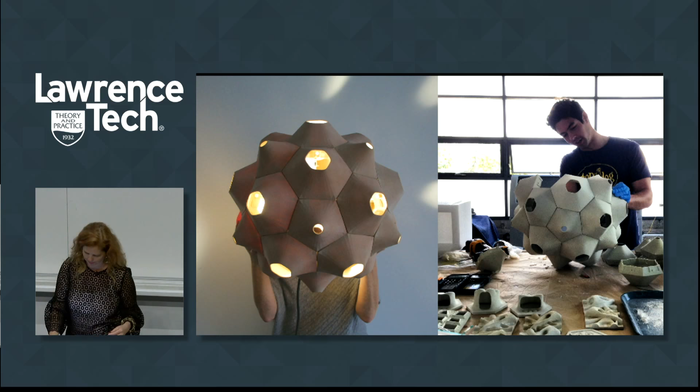So here's an example of something that was designed in my studio and assembled by someone else across the country. This is the Starlight. It's made out of 3D printed cement, a material that we invented, which I'll talk about a little bit later. One of the nice things about this particular light fixture is that not only can the digital file be sent across the world, and each of these parts printed somewhere else, they're small—the size of your hand—so someone can very easily assemble these small parts. This same light fixture can also be 3D printed out of different materials. Here on the left, you see copper-infused filament, and on the right, white bioplastic, which is made out of corn.

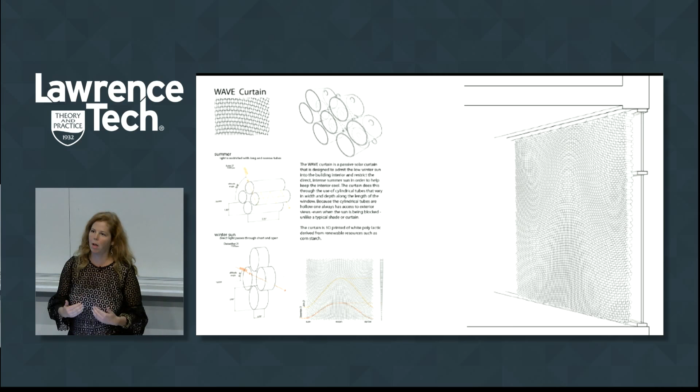Another advantage of 3D printing is that it allows for mass customization. You can design for specificity. In the design of this curtain, you can see in the drawings on the left that every one of these elliptical forms has a different profile and a different depth. The narrower, deeper tubes are located at the top of the window, masking the summer sun from coming into the interior, while the larger, shorter tubes are at the bottom, allowing the low winter sun to come in. Because every tube is unique, I have a customized surface that responds to the solar orientation and geography of the building.

But it still allows me to have views out into the landscape beyond. Unlike a traditional curtain or screen that veils the interior, I can see downtown Oakland. Again, this is designing for mass customization with specificity.

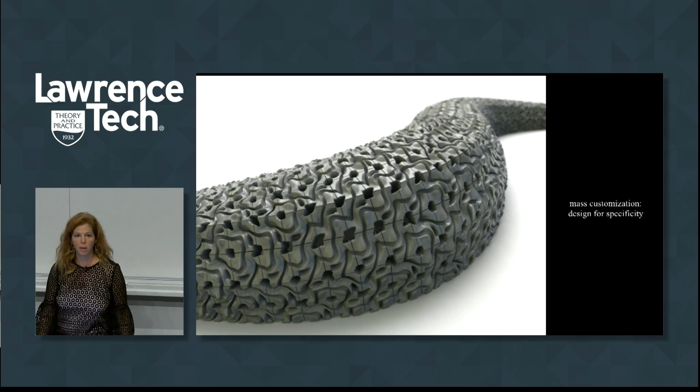Unique, one-of-a-kind building components can be generated quickly and economically from advanced three-dimensional modeling software. This bench, for example, is composed of 300 unique 3D printed parts. It's inspired by the sea slug, a biomorphic interpretation of a bench. The form comes from Flabellina goddardi, the newest species of sea slug discovered off the coast of California, and from the infinite tessellations of Japanese karakusa patterns, which are repeated across the doubly curved surface of the bench.

You can see here the 3D printed parts that come out of the printer in their green state, and every one of them is unique. All of these parts are finished with a glossy coating so that they reflect sunlight, since this bench was intended to be outside. They're assembled together as bricks or tiles that fit into your hand, making an 11-foot long 3D printed bench where every tile is unique.

So the sea slug bench demonstrates the potential for mass customizing, because 3D printers don't care whether they're printing 1,000 of the same parts or 1,000 unique parts. The cost of the material is the same, and the labor needed to make each part is the same. Custom parts can be manufactured without additional cost.

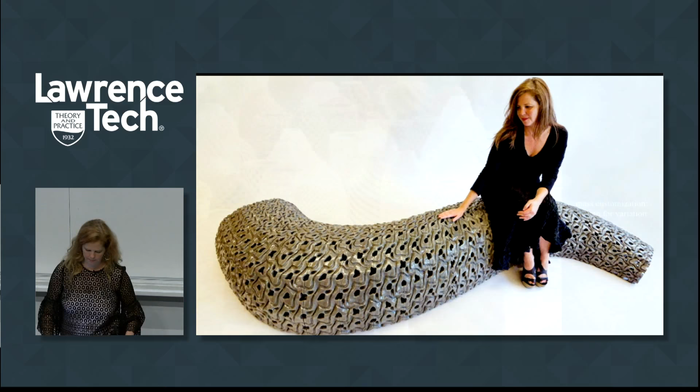Now, we can design for specificity, but we can also customize for variation. In addition to powder-based printing, which you saw earlier, we're exploring paste extrusion 3D printing, which has allowed us to explore radical 3D printing techniques, resulting in a series of objects called G-code clay.

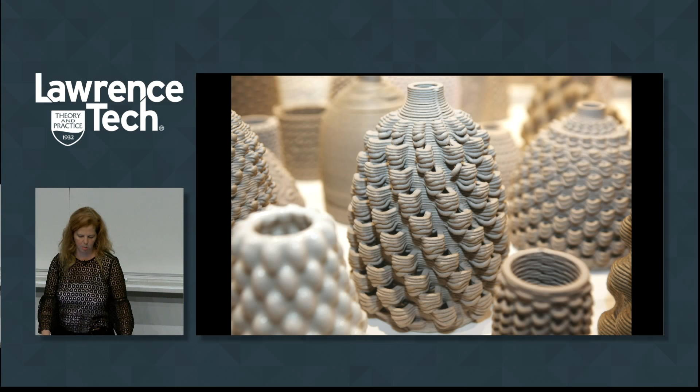Typically, extrusion-based 3D printed ceramic objects are defined by the layers of clay, whose striations are present on the surface. But as demonstrated here, the surface quality takes on the appearance of a knitted textile. The clay is looped, purled, and knotted as it droops away from the surface, and occasionally there's a dropped stitch, which causes a loop to pull away and makes every single print unique.

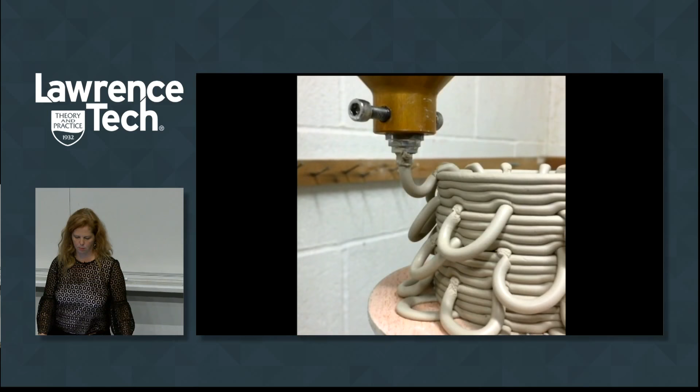The objects that are fabricated use various clay bodies. Sometimes we use recycled clay from the ceramics department at Berkeley. We use B-mix with grog, paper clay, porcelain, and other local clays that we've actually dug up in front of the architecture school.

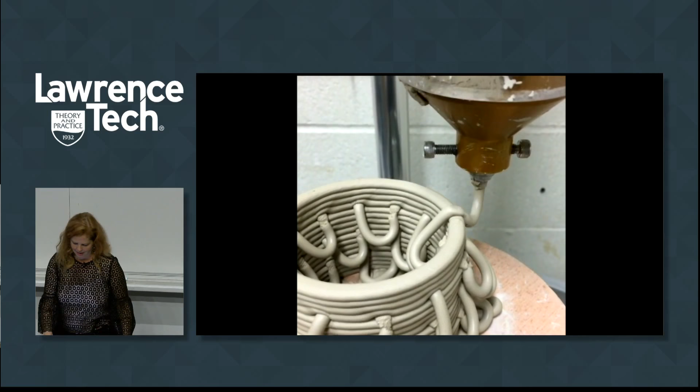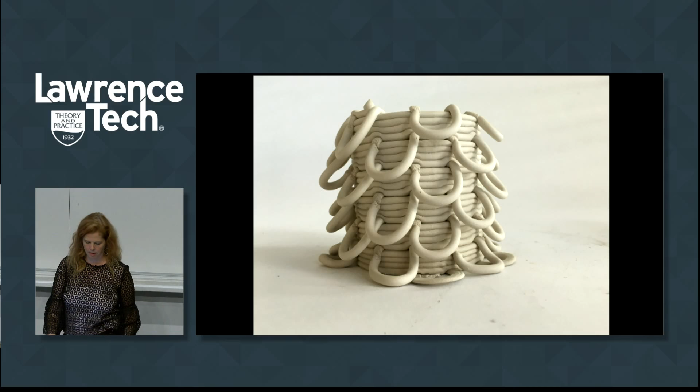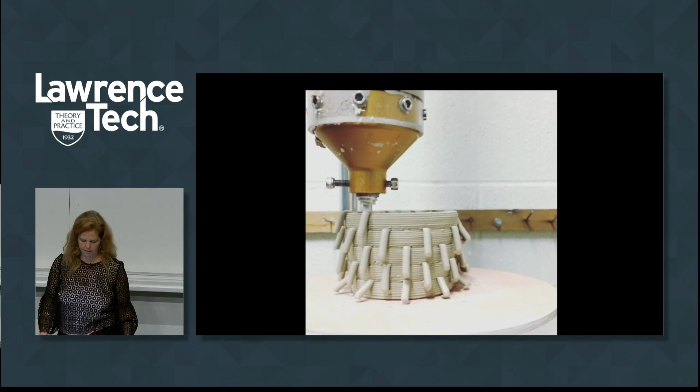This exploration doesn't concern itself so much with the shape or profile of the object, but rather the path that defines the movement of the 3D printer. Through this exploration, the printer is pushed outside the boundaries of what would typically define a printed object, and we've created a series of controlled errors that create new expressions in clay, defined by the plasticity of the material, gravity, and machine behavior.

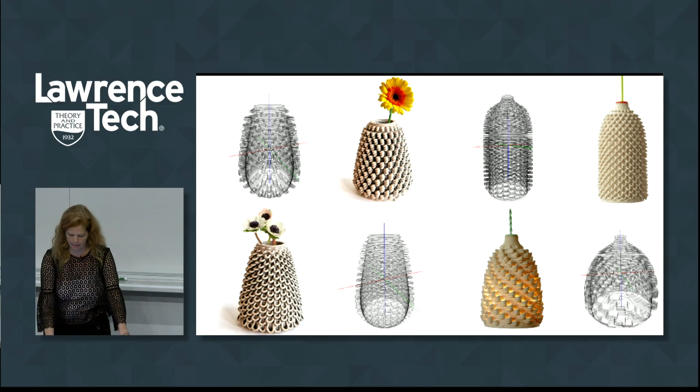The objects formed through this process have the potential to serve as enclosures for light and for life, such as plants and water. But we're working towards creating building-size enclosures with distinct qualities of earthiness, furriness, or softness—enclosures with textures that can enhance functions. For example, the texture on this mud dwelling in Africa serves as steps and speaks to the frequency with which the surface needs to be replastered.

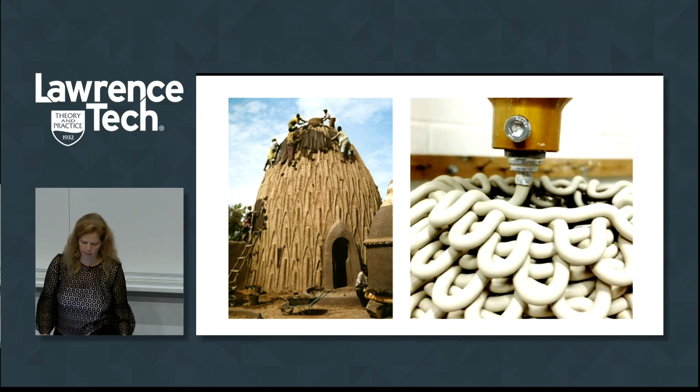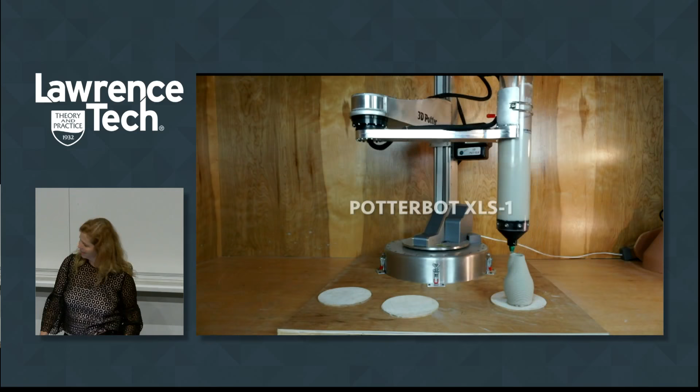And so we're working with an engineer to develop a high-speed, large-scale 3D printer specifically for printing clay and earth to make room-sized structures.

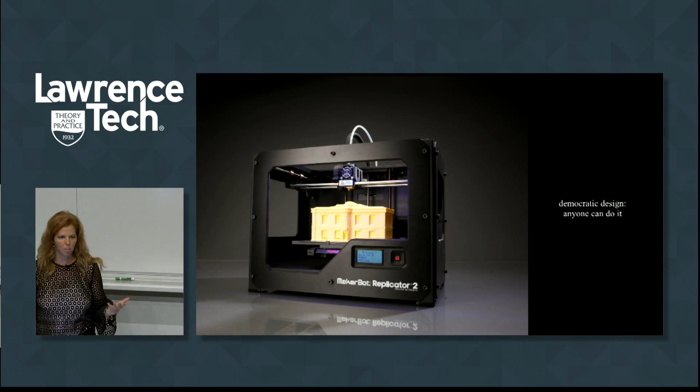Democratic design—anyone can do it. You can do this too. You don't need a special, expensive 3D printer. Desktop printers sell for as little as $130 now, and you can buy one and have it on your desk in studio. You can use inexpensive ecological materials such as PLA, polylactic acid, or bioplastic, which is made out of corn, and 3D print your own building components.

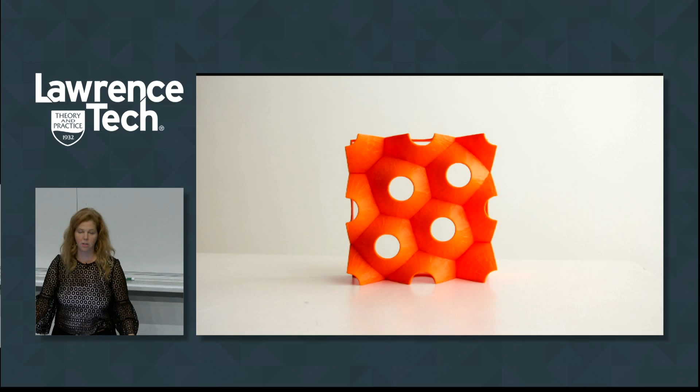The blocks are held in place with 3D printed orange clips that have 4 prongs that connect the blocks at the corners. The wall takes advantage of the translucency of the bioplastic, giving it a softly scalloped, diaphanous quality when used as an enclosure in front of a window or a light.

One of the nicest aspects of this process is that it doesn't require skilled labor for assembly. Anyone can assemble their own objects and make customized enclosures. These desktop printers have addressed the contemporary concerns around accessibility and custom manufacturing. 3D printing a custom enclosure is not a future proposition, it's a current reality.

Building on the knowledge that we gained making the Pico Roco wall, Emerging Objects fabricated one of the largest PLA or bioplastic-based 3D printed structures built to date. It's called the Star Lounge.

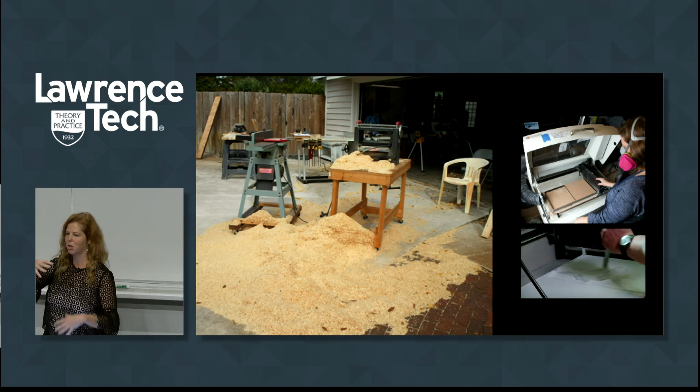If you see the image here on the left, this is a planer where someone's planed down a lot of wood, and you see all the residual sawdust. This is a material that is a byproduct of manufacturing, and subtractive manufacturing in particular. We don't see this because in your wood shop here, I'm sure you have a wonderful vacuum system that takes all of that dust away.

So you have some raw material to work with here. In the image on the upper right, I've taken the sawdust and put it into a powder printer, and we are able to print with this material. Because additive manufacturing makes no waste, I can continually recycle that recycled material in the 3D printer.

And of course, the video on the bottom is just to familiarize you with powder-based 3D printing if you're not familiar with this process. There's essentially a build bed on the right and a supply bed on the left. That supply bed is filled with the material, in this case a plaster-based material, that raises up and spreads a thin layer across the build bed.

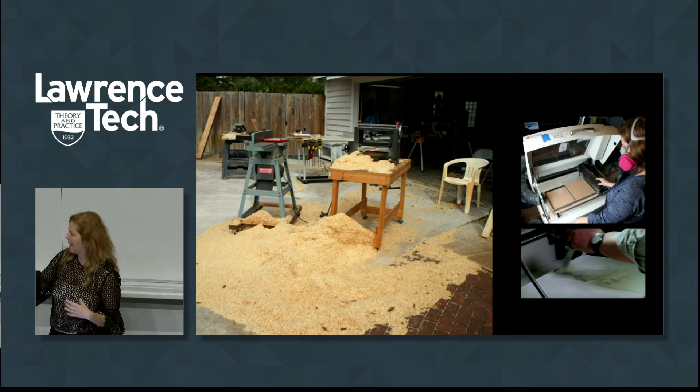Then an HP inkjet head sprays a binder onto a very thin cross-section of the digital model. That build bed drops down, the supply bed comes up and spreads another thin layer. That happens hundreds or thousands of times until a three-dimensional object is made. It's then excavated from the loose powder, much like an archaeological dig.

And we did. We've developed a formula for 3D printing with wood waste. It's sawdust that is then pulverized into a flour. One of the beautiful things that emerged through this research is that there's a new kind of wood grain emerging, based on the orientation of the object in the 3D printer. So we can control that wood grain based on how we position the digital model in the printer.

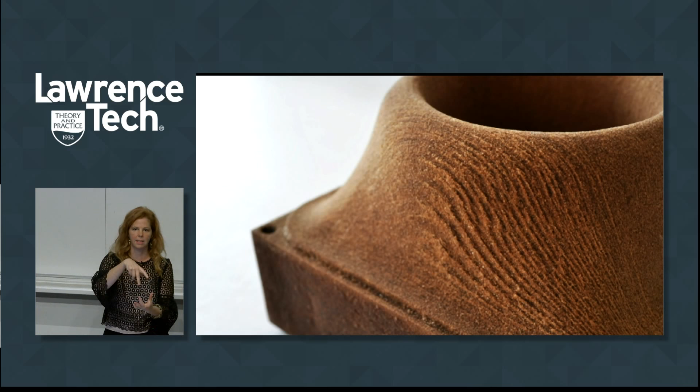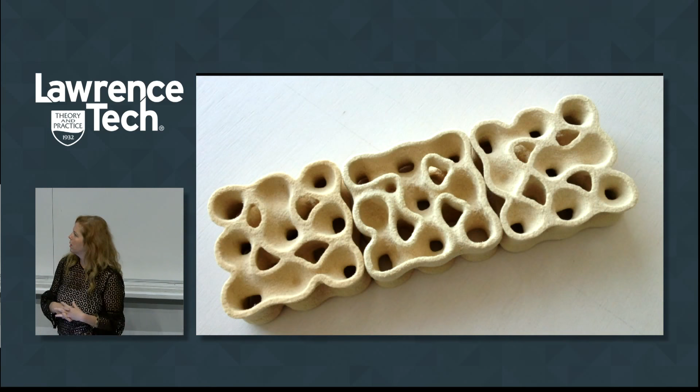It's translucent when you print it thinly enough. We've experimented with different types of wood. This is a soft wood, it's pine. This is maple. And this tile is made out of walnut shells.

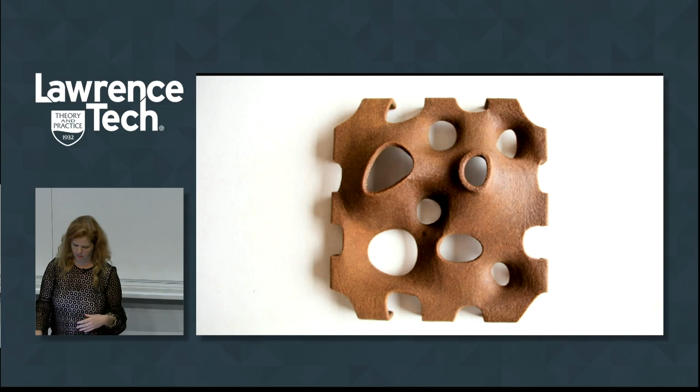That tile is designed again using the Karakusa pattern to repeat across a surface continually and be rotated to hide the seams, making a much larger pattern—one that has pores in it that allow for the passage of light, views, and air.

So no waste, and we've touched on material innovation. There's more, okay? Through material innovation at Emerging Objects, we're able to address one of the world's most pressing issues today: the impact of production, consumption, and the disposal of goods upon the Earth's resources. We want to invent materials that are sustainable, durable, and affordable, that can be used to craft and construct new objects for the built environment.

To emphasize this point, I want to tell you a short story. This is a very simple object—a humble teapot manufactured by Friesland Porcelain and sold by the Melitta Group in Germany in the 1970s. The teapot was purchased in Salt Lake City at the Zion's Cooperative Mercantile Institution, the first department store in the United States, by a woman named Sandra Newell.

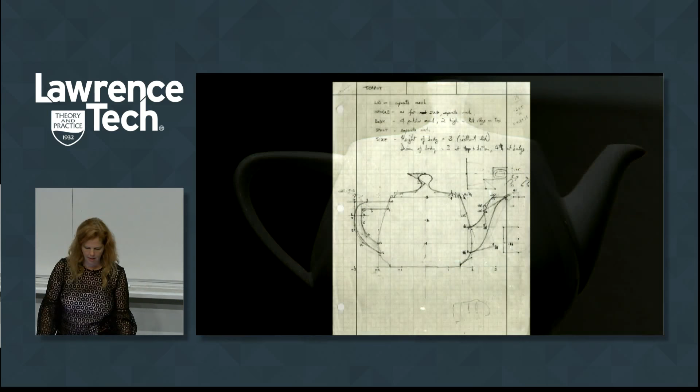For his work, her husband, Martin Newell, needed a simple mathematical model of a familiar object. So Sandra suggested modeling their tea service since they were sitting down to tea at the time. Martin sketched the teapot freehand using graph paper and a pencil, and then went back to the computer laboratory and edited the Bezier control points on a Tektronix storage tube, which I don't even know what that is.

This is like so long ago. Again, he did this by hand. So starting from these sketches and with some algorithms, he created a mathematical model for the teapot.

It turned out that the teapot was the ideal object for the graphics experiments of the time. It was round, contained saddle points, could project a shadow on itself, and could be displayed accurately without a surface texture. So Newell made the mathematical data describing the teapot's geometry publicly available, and soon after, other researchers began using the same data for their computer graphics experiments. The teapot quickly became a beloved staple of the graphics and computer community.

Teapot after teapot graced the pages and covers of computer graphics journals. Anyone with a new idea about rendering and lighting would announce it first by trying it on the teapot. It's been rendered as if made of alabaster, red brick, leopard skin, and animal fur. Most famously, in 1987, a paper introduced the image, casually describing it as one of the 5 Platonic solids, plus the newly discovered teapotahedron.

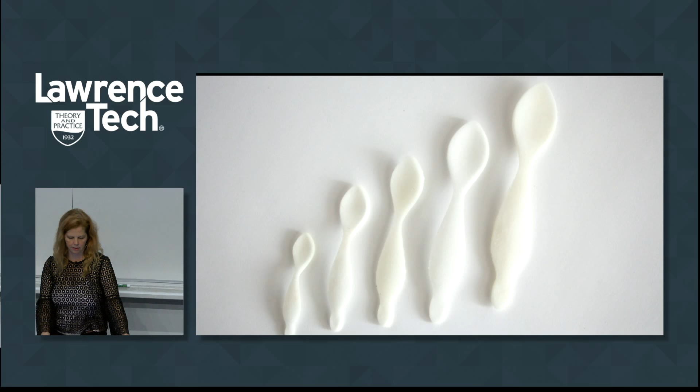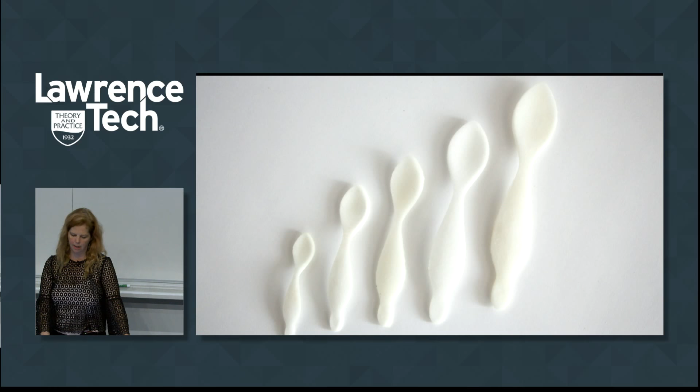Materials such as sugar can also easily be 3D printed, and because of sugar's inherent solubility and stickiness, it's possible to print the sweetest of confections. In this case, sugar spoons are printed in volumes corresponding to one teaspoon, two teaspoons, one tablespoon, and beyond, and these printed sugar spoons can be stirred down and dissolved into one's coffee to flavor it with sweetness.

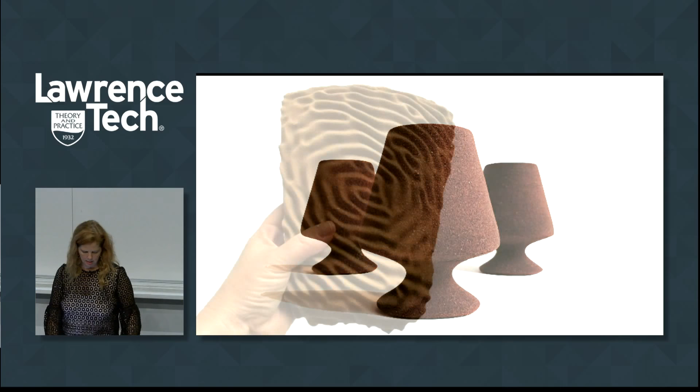Another material we've been experimenting with is Chardonnay pomace, the solid remains of grapes after pressing the fruit to make wine. It contains the skins, pulp, seeds, and stems of the fruit. Grape pomace has traditionally been used to produce brandies such as grappa, which Italians have done for thousands of years, but today in the United States, pomace is mostly used as fodder and fertilizer. But much like the coffee cherry, grape skins and seeds also have the potential to be dried and ground into fine powders for 3D printing. So we've used Chardonnay pomace to make wine goblets and Chardonnay building blocks, which we radial arrayed to make an ice bucket for Perrier-Jouet.

But perhaps one of the most frequently used materials in our studio is salt, because we're in the Bay Area, so it's a local material for us. It's been industrially harvested from the Bay for over 150 years. At its peak, the Bay had 40,000 acres of land dedicated to salt production and produced over 1.3 million tons of salt annually. It's a renewable resource, it's incredibly inexpensive, and it's made simply through evaporation. The Solar Salt Works in the San Francisco Bay uses only natural power from the sun and wind to make this material. It can be printed and formed into objects we're familiar with, such as functional salt shakers.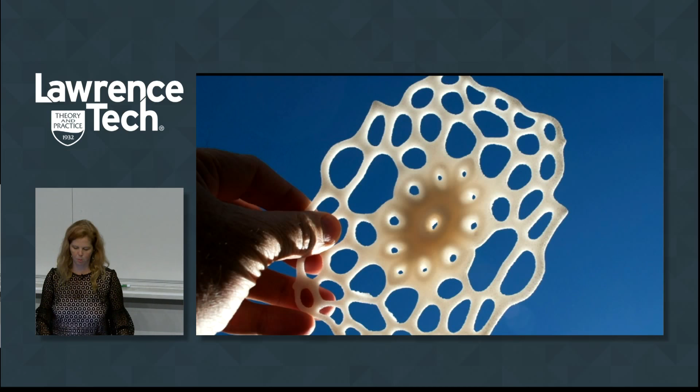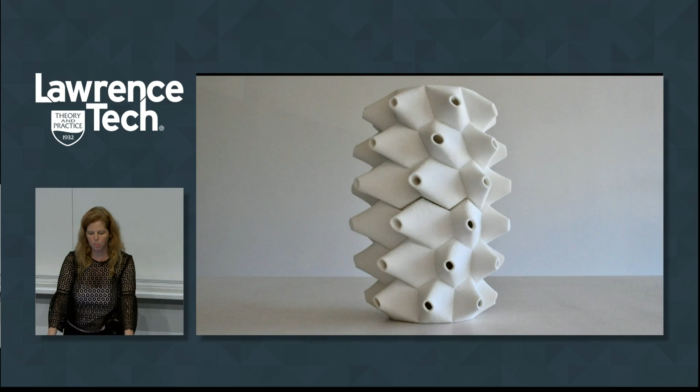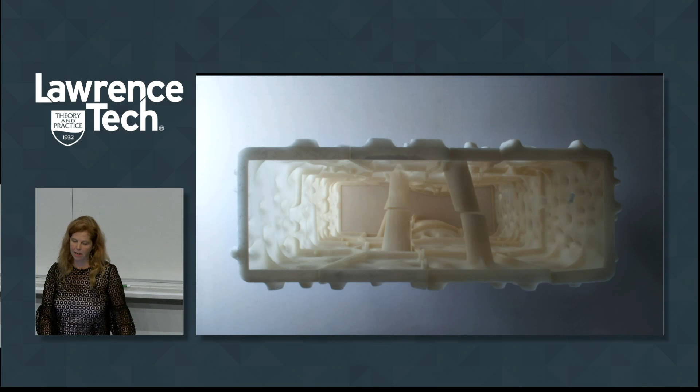Salt always has incredibly beautiful optical properties of translucency, no matter how thick or thin it's printed. We've experimented with shaping salt blocks into forms that would otherwise be impossible to make with molds, and we've experimented with techniques for interlocking and stacking these 3D printed salt blocks, exploring the structural properties of the material as well. The micronized salts we print with have an ultra-fine resolution and can be printed very thinly with very, very fine details.

Each fall in the Bay Area, 150,000 tons of salt is harvested. So this is last year's harvest at the beginning of the harvest. It's a pretty amazing sight to see.

The company that owns the crystallizers in the Bay has given or sold 16,500 acres of land to the government for wildlife redevelopment, and an additional 1,400 acres has been set aside for a residential development of 12,000 homes for 30,000 people.

This raises the question: does salt have the potential to be an integral material resource for this housing development, should it happen? So we decided to create a Saltygloo, kind of igloo, made out of salt and glue, to see if we could harvest this material from the ground beneath our feet.

We were inspired by the forms we found in traditional salt extraction processes and designed an igloo that could be 3D printed with the salt from the San Francisco Bay.

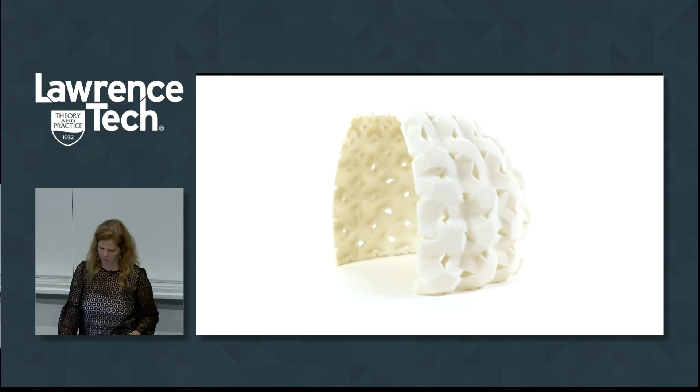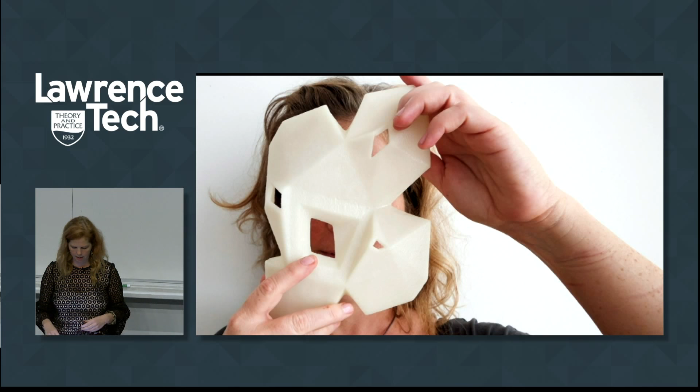We designed and printed individual tiles that had crystalline forms inspired by the microscopic forms you find inherently in salt crystals. And we created an enclosure made out of salt.

The salt is intended to preserve and enhance the role of the interior environment. It allows diffuse light to enter into the interior, and from the exterior, one can see glimpses of the interior.

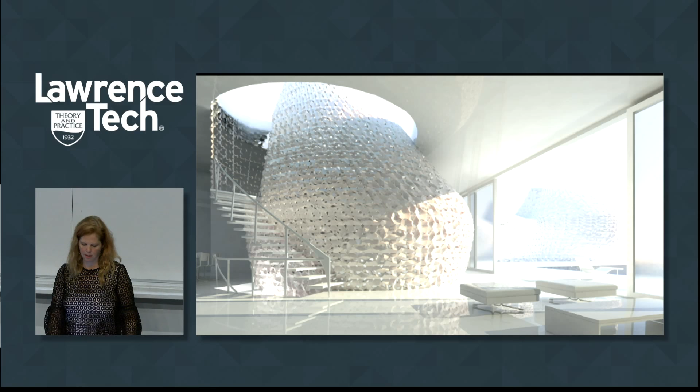We always imagined the Saltygloo would be used in the interior to create semi-private enclosures, to envelop spaces such as dining rooms where this material connection seemed logical and meaningful, or maybe a bedroom that could be enhanced by the softening of light.

The Saltygloos are objects in the interior. They serve as vessels for human activity.

Rubber. This is another material that we've experimented with. Automobile tires are one of the planet's biggest waste problems. In the United States alone, 290 million scrap tires are disposed of every year.

Around 80% of those tires are recycled, but we'd like to find a new application for the rest, which is still 60 million tires. In fact, the world's largest tire graveyard in Kuwait is so vast that it contains over 7 million tires and is visible from outer space. Worldwide, there are almost 1 billion tires discarded annually.

Discarded tires are so problematic because of the large amount of tires produced each year, their inability to degrade, and the fact that they contain a number of components that are environmentally damaging, such as carbon black.

So we've been working with a company that's developed a material called MRP, micronized rubber powder, and it's generated through a cryogenic manufacturing process. The tires are frozen, reduced to a rubber crumb, and then ground into a really fine mesh that might typically be used in roofing or in asphalt pavement.

The rubber powder is incredibly inert, and therefore it's mixed with other additives to make it printable. The mixture is adhered together with an organic binder.

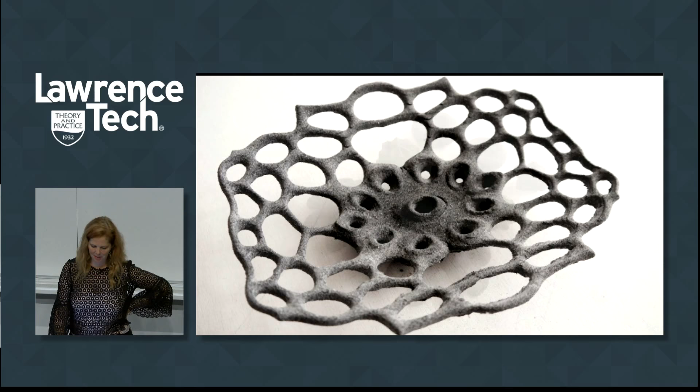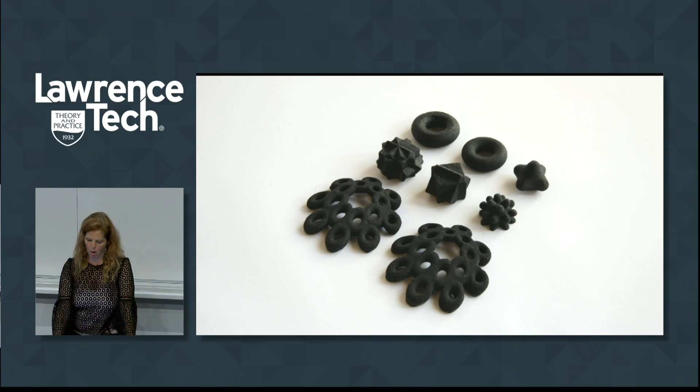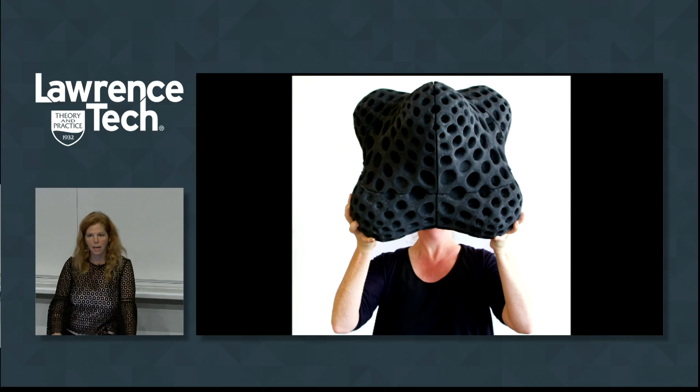Cement. Cement is the most ubiquitous building material in the world, and it needs to be transformed for 3D printing. According to the United Nations Environment Program, in 2012 alone, the world used enough concrete to build a wall 89 feet high and 89 feet wide around the equator.

From 2011 to 2013, China used more cement than the United States used in the entire 20th century. It's estimated that 10 billion tons of concrete are produced worldwide each year, which translates to 2 tons of concrete per person in the United States.

This means unrivaled amounts of natural resources are being depleted annually just to produce concrete. Of equal concern is the issue that the production of Portland cement releases enormous quantities of carbon dioxide into the atmosphere. And 1 billion cubic meters of water are used each year in the production of concrete as well.

This demands an urgent call for concrete design and production to become more ecologically responsive in the 21st century, as the planet cannot continue to consume concrete at our current rate.

One of the advantages of 3D printing with concrete is that no formwork is required. Oftentimes, formwork can cost up to 60% of the total construction cost.

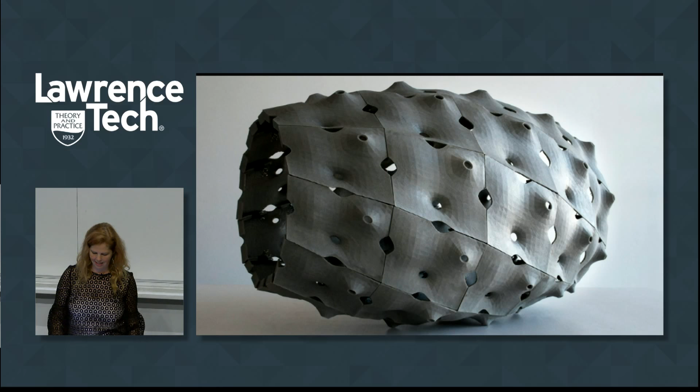We've experimented with aggregating these 3D printed concrete tiles to create larger objects, and with different methods of attachment. This slide shows an early method of fastening using binder clips.

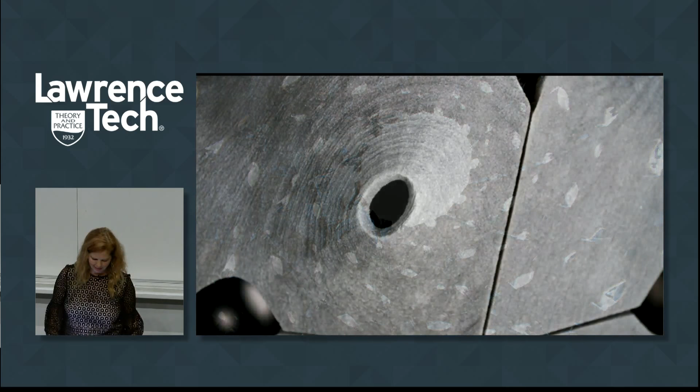We've experimented with different finishes: glossy, which you saw on the seat slug at the beginning of the lecture, and matte here, which has been sandblasted to bring out the grain of the 3D printed cement. These tiles, 20 hexagons and 12 pentagons, are assembled together to make the P-ball, a puffy spheroid or buckyball, in which each tile is unique and has a specific geometry that allows the parts to come together to make a more complex whole.

One of the most rewarding aspects of 3D printing for me is that the digital model used to make a scale study model is the same digital model that can be used to print something at full scale.

Bloom is an experimental pavilion that explores 3D printed Portland cement at an architectural scale. It's 9 feet tall with a footprint that measures 12 feet by 12 feet, composed of 840 customized 3D printed cement blocks. The floral motif embedded in the surface of Bloom is derived from traditional Thai flower patterns.

It's mapped cylindrically onto the surface of the structure, creating a figural pattern comprised of openings that produce stunning visual effects of light, shade, and shadow on the exterior and interior. On the interior, one can find an internal structural grid that carries the forces of the weight of the cement block down to the ground.

The individual blocks were printed on a print farm of 11 powder printers with a special cement composite formulation comprised of iron oxide-free Portland cement. Iron oxide imparts a gray color to cement, and its removal makes these blocks much lighter in color. If you look closely, you can see the holes printed into the sides of the blocks, and that's how the blocks are fastened together.

The blocks at the bottom of the wall are about 5 inches deep, as you can see in the drawing on the left in the floor plan, and the blocks at the top of the wall are about 1 inch deep to reduce weight as the load is transferred down. The curvilinear form of the overall structure adds stiffness to the thin, lightweight shell.

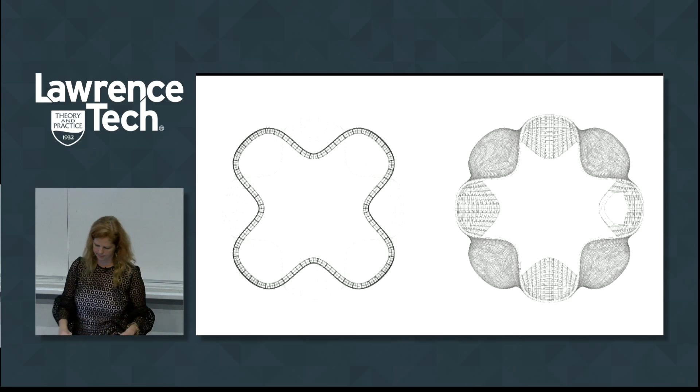In plan, Bloom is a curved cruciform that rises 9 feet to meet the same shape rotated 45 degrees, creating a torqued X, with an entrance 45 degrees off its primary axis.

All of the blocks are enumerated to designate their position in the overall structure. They've been assembled into 16 large, lightweight, prefabricated panels, which can be put together in just a few hours to create an enclosure.

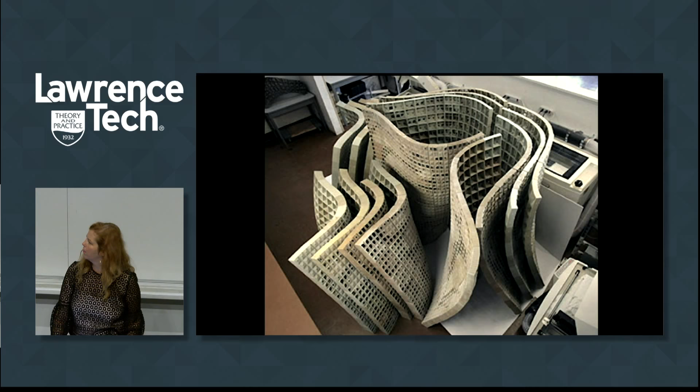This quick video just shows how quickly the pieces come together and how it can be set up and dismantled. It's been shipped around the world in these large pieces, and they're also very lightweight—there's a lot of air and porosity in these 3D prints, which reduces the mass.

Okay, so now it's time to wake up a little. We're going to talk about bad ombres and switch gears.

Ombres that are simply bad are bad because they don't transition from light to dark or from one material to another seamlessly—they're abrupt, harsh, unnatural, out of place, artificial affronts. So when Donald Trump said he wanted to build a wall to keep out the bad hombres, he was referring to bad men. But what he said was bad ombres, which is something entirely different, and something that a wall, a distinct line, or a boundary creates.

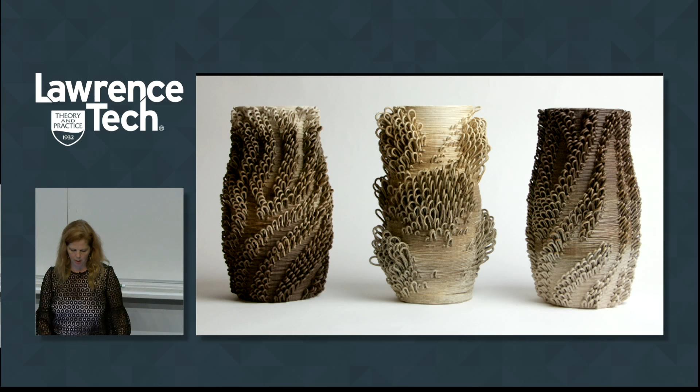So in response to Donald Trump's bad hombres statement, we've created a collection of 3D printed objects in clay. The objects smoothly transition from one material to another seamlessly, and the clays come from all over the world to California, where they're combined in a single tube that extrudes clay continuously. Using G-code, the computer language that speaks to the printer, we take the clay on a walk along a path.

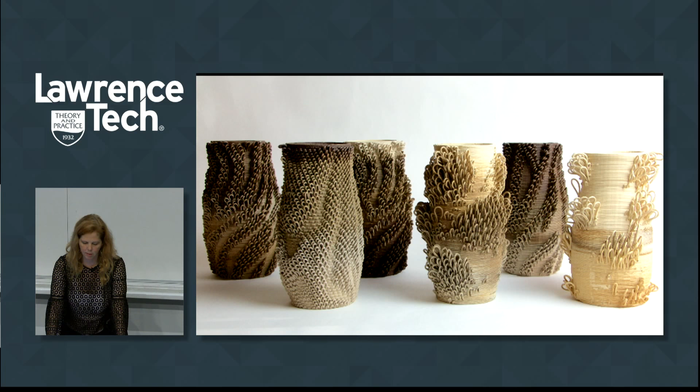The whitest clays are porcelain from Matauri Bay in New Zealand, where the porcelain is translucent and resonant. The dark black mountain clays come from the pits of the South in the United States, and these clays are mixed in California to create a custom recipe that makes a new, stronger body.

Through the use of varying clays, the bad ombres are intended to create new geographic and geologic landscapes. They're objects that transcend borders, simultaneously rooted in the ground from which they emerge, yet global and elusive.

No object in this collection will ever be recreated exactly the same way again. Failure, individuality, distinct character, unique markings are all what make these pieces special. Their differences make them one of a kind, but the ombre itself ties them together.

So we've been pursuing continually this idea of ombre and decided to introduce it to the powder materials as well. And we wondered, would it be possible to move seamlessly from one material to another? And how does that enhance our understanding or perception of material, color, or culture in objects?

So to begin this research of creating material ombres using the powder-based 3D printing, we started with Chardonnay and cement. Cement, of course, being the most ubiquitous building material we could find, and the Chardonnay being an abundant local material for us in the Bay Area, as it comes from close by Sonoma. So we printed tiles out of cement and Chardonnay, and we also mixed the cement and Chardonnay together.

And this gave us a large surface, but there were still joints in the material, which pushed me to develop a formula for printing with Chardonnay and cement, one that would allow for the smooth transition from an architectural and agricultural material to a geological material without any joints, adhesives, or mechanical fasteners.

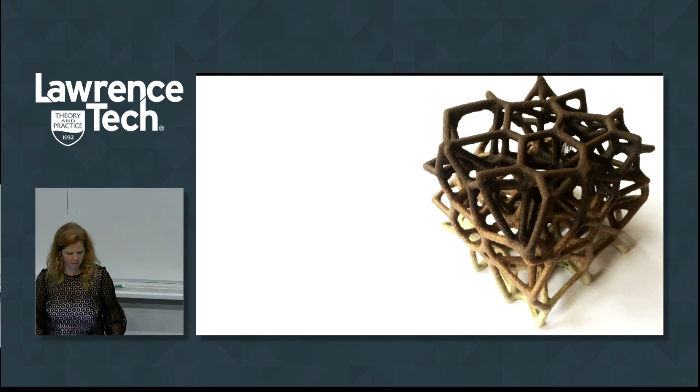The forms of these decanters are inspired by ancient ceramic wine carafes and amphora, and the surface textures are inspired by the diamond pressed texture frequently found in objects such as wine glasses and decanters.

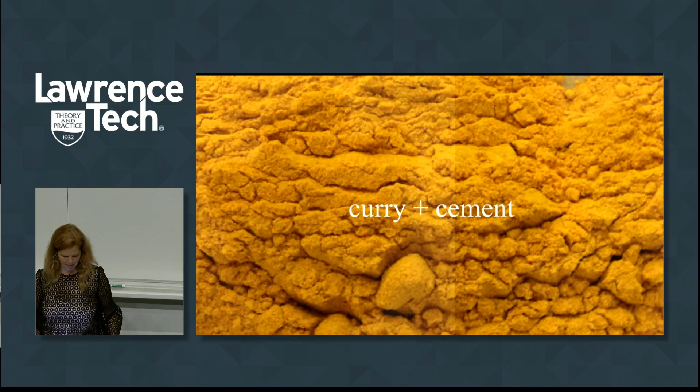The aroma of the curry as it's being printed is pervasive. It fills the room. This object is now 8 months old and it still is fragrant.

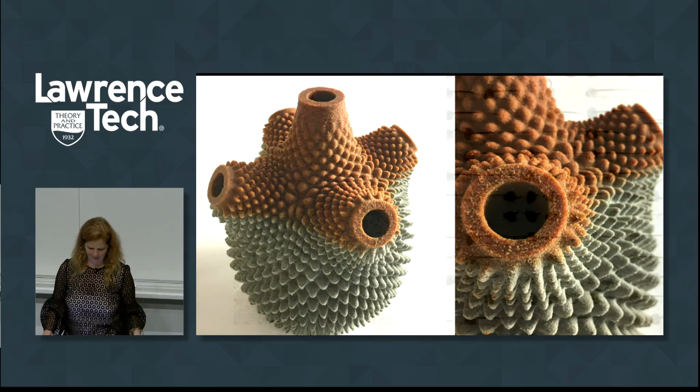And finally, what's next? A 3DP cabin. So we're trying to bring all of these materials and technologies together to build a building made out of 3D printed components.

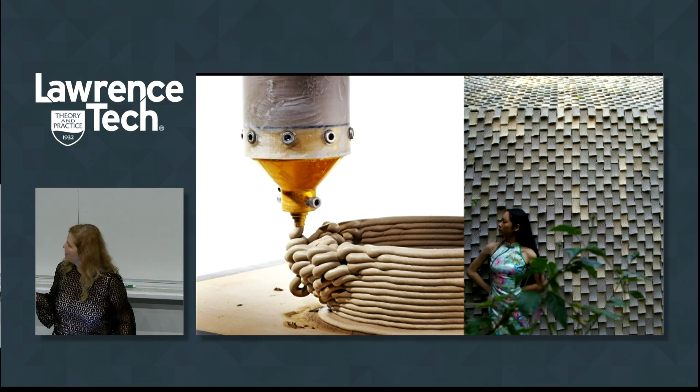So here you can see the 4,000 ceramic tiles that are cladding the roof and the exterior walls, the bioplastic panels that make up the interior. The panels are translucent. They have color-changing LED lights behind them, and they change color with the light as well.

And here, of course, are the Chardonnay and cement planter tiles that will hold vegetation. The building is located in a garden. And it's our goal to make everything using this technology and the materials that we've been experimenting with.

So we're printing and designing our own furniture, such as chairs. We're designing the tables, the tabletop accessories, and even the hardware, with the intention of creating a total work of 3D printed architecture, interior, and art. One that uses innovative materials, has no waste, can be manufactured on demand, and printed by anyone, even you.